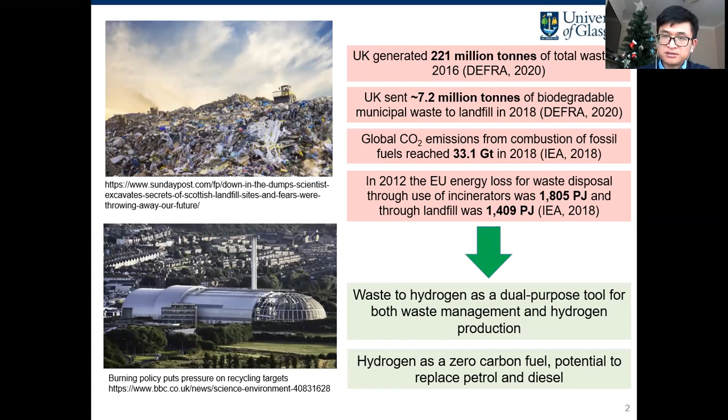So it will be interesting to explore if it's environmentally favorable to consider waste as a source of hydrogen, in addition to those existing methods, for example based on fossil fuels or from water electrolysis.

Unfortunately, not all waste could be handled by those three prioritized methods. For those non-recyclable ones, alternative methods need to be found to achieve sustainable management. Conventionally, landfill and incineration have been considered effective methods to handle those non-recyclable ones.

During the past decades, some relatively advanced technologies such as gasification, pyrolysis, anaerobic digestion, and fermentation have been receiving increasing attention due to their potential to be more efficient, to be more clean. So in this analysis, we will consider two technologies.

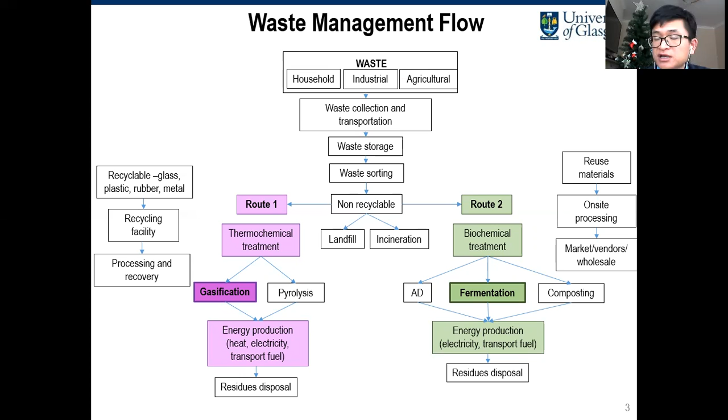For the gasification technology, we consider it used to handle waste wood and municipal solid waste as an overall type of feedstock. The reason why we consider gasification here is because, first of all, it's proved to be effective to recover hydrogen from those mentioned feedstocks.

Secondly, the technology readiness of this process is relatively high, which means that once it's found to be environmentally friendly, it's possible that some scaling up research, study, and deployment could even be implemented.

The third reason is that there is relatively abundant data about this technology, which will facilitate our preliminary analysis.

But of course, we are aware that for this technology, there are different stages and different operation factors, and equipment conditions will affect the energy efficiency and overall performance of this technology. There are a variety of data sets about this, but for our analysis we will consider some average data we got from the literature.

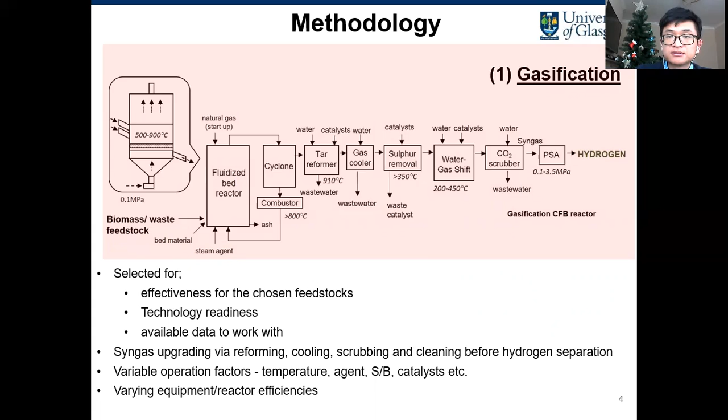The second technology is fermentation, which converts organic waste into hydrogen. We consider using this technology to handle wet waste, specifically food waste and sludge.

We also consider the potential requirement of this technology for pretreatment. This pretreatment stage will definitely affect the overall global warming potential of the system considered.

In addition to dark fermentation, we also explore the potential to have an integrated development that is based on the combination of dark fermentation and photo fermentation.

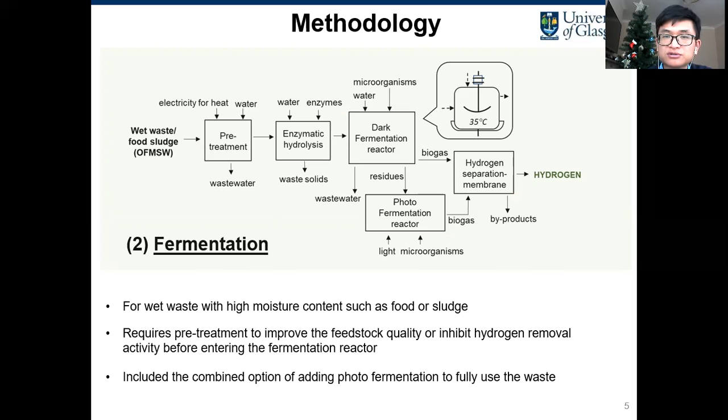The reason for this consideration is to do some initial exploration about having this kind of integrated, hybrid design to enhance resource utilization.

Before we carry out the analysis, we also try to identify the potential issues or limitations of these two types of technologies, which will potentially help us shape the design and configurations of the systems, or improve the overall performance of the technology or system we considered in the analysis.

For example, we are aware that solid waste is typically featured by low energy density with potential impurities, and high moisture content of solid waste might be a potential concern to the thermochemical process, that is the gasification technology.

For food waste treatment, the ratio of carbohydrates to lipids and to proteins will potentially affect the overall performance and energy efficiency of the technology.

And for the gasification technology, which generates syngas as a direct product, a subsequent syngas upgrading process is needed, which will incur additional energy and emissions.

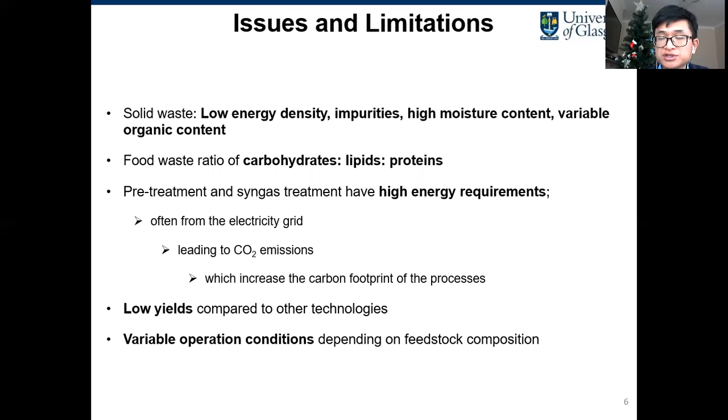So this is the system boundary of our assessment. We consider the 4 main stages ranging from sorting, main process to syngas cleaning for gasification, and the storage of hydrogen for subsequent or downstream application.

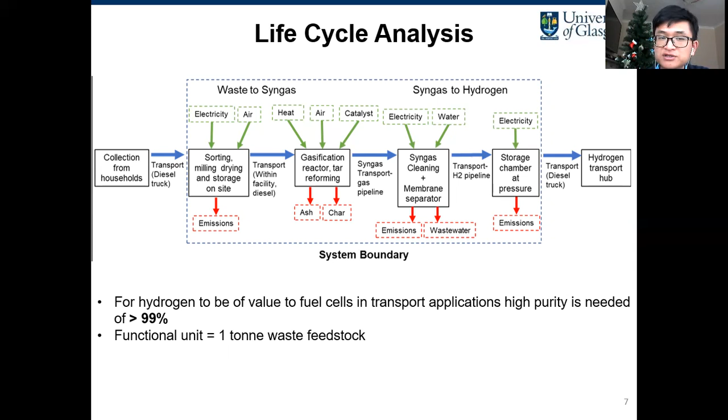And we also consider that those technologies we evaluated will generate hydrogen with purity higher than 99%. Our initial analysis adopted a functional unit of 1 ton of waste feedstock.

So let's see some results. This slide shows the comparison of the global warming potential of the 4 technologies or configurations we considered, which are dark fermentation, dark and photo fermentation, municipal solid waste gasification, and waste wood gasification.

We found that waste wood gasification has the highest global warming potential, and generally the gasification technologies have higher global warming potential than the fermentation technologies, in terms of 1 ton of feedstock treated.

This is because for the gasification-based technologies, we consider the hydrogen upgrading processes involving, for example, cleaning, scrubbing, hydrogen separation, as well as storage and compression. These stages contribute significantly to the global warming potential.

And when we compare waste wood with municipal solid waste, we found waste wood has a higher global warming potential than municipal solid waste, based on 1 ton of input.

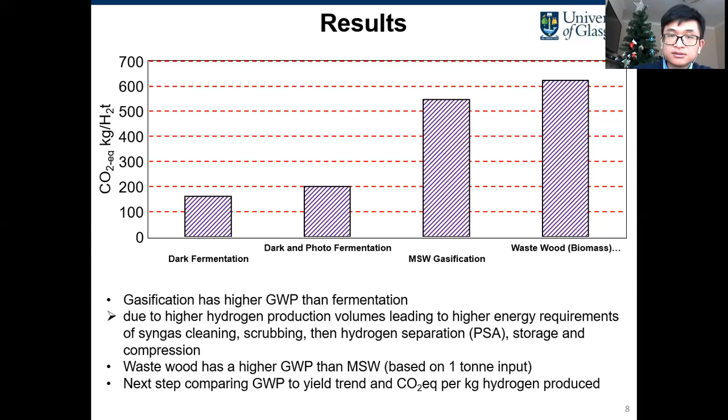This highlights the importance of having a standardized or consistent system boundary consideration in this kind of research, for long-term or future cross-study comparisons.

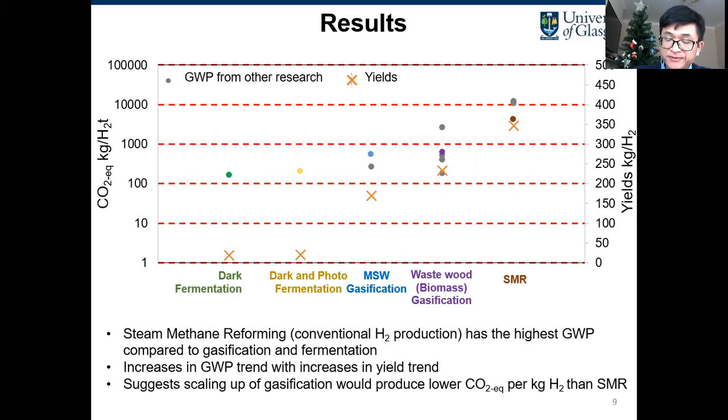We will explore this a bit more in the following slides. This slide basically tries to explore the relationship between the global warming potential and the yield of hydrogen.

In this case, we consider the functional unit to be 1 kilogram of hydrogen produced instead of 1 ton of feedstock treated. Very interestingly, we found that waste gasification has the lowest global warming potential.

In our very first graph, we found waste gasification has the highest global warming potential in terms of 1 ton of feedstock treated. This means that the functional unit selection is important for comparisons, and for deciding the comparative relationship between these two different technologies.

But definitely the selection of the functional unit will depend on the demands of the development in many cases. In this case, the fermentation technologies have higher global warming potential compared to the gasification-based technologies, because gasification-based technologies generally have higher hydrogen yields.

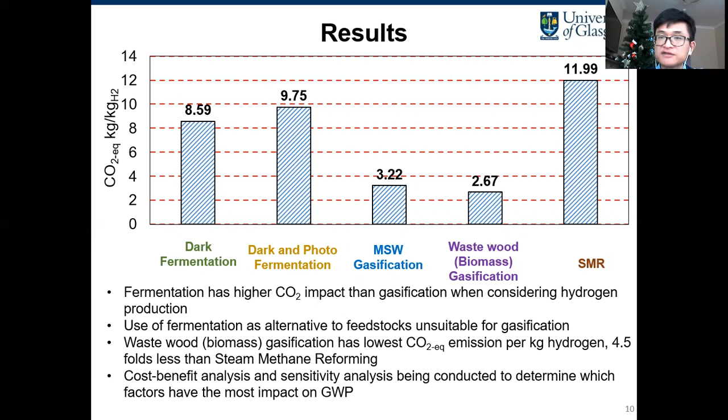We're also doing cost-benefit analysis and sensitivity analysis, trying to explore the association between the life cycle assessment results and the economic feasibility or profitability of these different types of technologies.

In conclusion, our preliminary research found that waste-to-hydrogen technology is important if we want to have low-carbon hydrogen production compared to the existing fossil fuel-based technologies.

There are additional factors we need to consider in order to improve our analysis and also improve the design of our configurations, and we are currently working on that. Hopefully we will be able to communicate about that in the future.